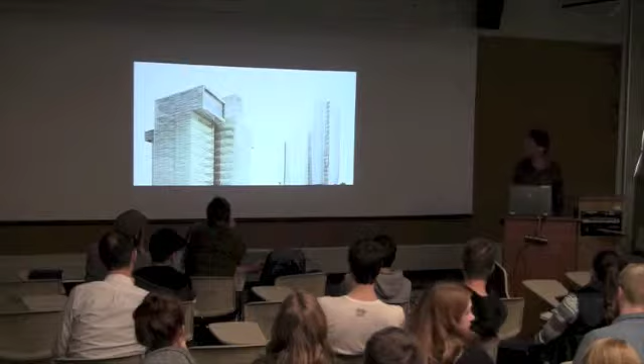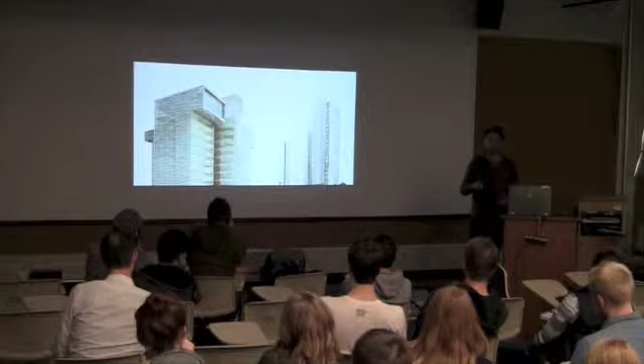One's from 2001, before there was even V-Ray, and that one is 2004-ish. The reason I put these up here is because they show the kind of designs we've been trying to achieve. The attitude is all about repetition. There's a hidden formula in both of these skins where a pattern repeats over and over again, but we're trying to make it look like there is no pattern. We're trying to get away from that Miesian, repetitive office building look, while still working within a manufacturing process based on a part that gets repeated over and over again.

This is a lab project that I worked on in Buffalo. It's also one of those buildings where you can see we've cleverly tried to mask the fact that it's really a pretty basic system, repeating over and over again.

It's a Centria metal panel on the exterior, insulated metal panel, and the glass windows inset into the curved facade are actually flat—they don't curve with the building. So we've cleverly tried to create something that looks non-repetitive and unique, but in a way that suits a manufacturing process we thought existed. I think at the time it did—it was a true piece, a reality.

These are views from the inside. I put this image up because we always have this problem with variegated facades, where we have a pattern on the exterior that we want to be repetitious to create that texture, but there's always a compromise—there's always a place where you want a big window on the inside and a small window on the outside. How do you resolve that? With a system based on repetition, it's less flexible, but if you have a system with a lot of components and variation possible, you can deal with situations like this.

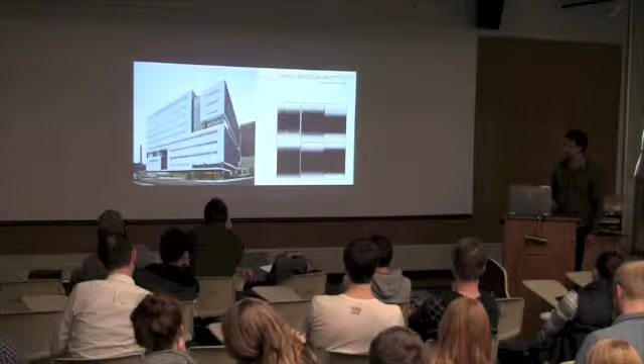Then we looked at what kind of pattern we would create. We used different frit patterns and dot patterns to create a very gradual blend between the two. It opened our eyes and made us start thinking that, depending on your construction process, you don't necessarily have to think about mass production—because if it's a printer, it doesn't care.

That evolved into the next series of projects. This is another project where we're looking at variation on the facade, but trying to rationalize it down to just a few simple components. I think the interesting thing about this project, though, is actually the roof, and I'll get into that, because that's really where digital fabrication became essential to pulling off the project.

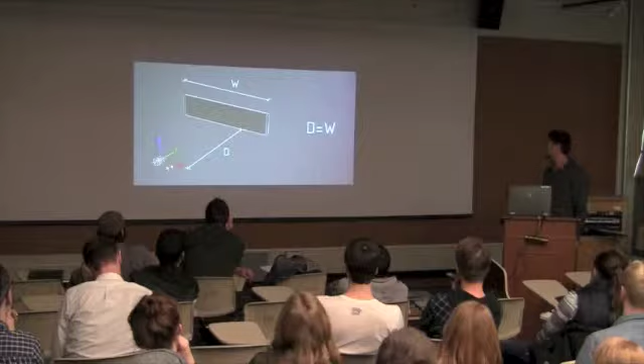So let's see what I have here next. This is a video that shows how we developed that facade. Let me see if this one will play—some of these will play, some of these won't. It's okay.

It's fun, because I don't really want to talk about the facade. It's a point attractor. Are you guys familiar with point attractors? Anyone ever do those in scripting? Basically, it's a relationship between these points floating in space and those panels. The closer the points are to the panels, the more they're going to open up. So we can create this pattern by manipulating these points. So the point is that someone doesn't have to go in one at a time and change each panel, because now we have sort of a marionette. With a couple of different controls, we can create all this patterning and all these effects.

I wanted to return to that later, though, when we talk about Grasshopper. So really, I wanted to talk about the roof more. This one, check out this roof. It's first of all, it looks pretty simple, but it was actually pretty tricky to model.

You could do it in Rhino, but there was a lot of blends, and it ended up being this poly surface that was really hard to manage. If one thing changed, you had to rebuild the entire thing. So it wasn't really practical to work with it in that format. At the same time, we've got this kind of free-form surface. How do we manufacture and how do we document that in a way that doesn't freak people out? Because they're going to look at that and see this completely non-repetitive, non-uniform thing, and they're thinking in terms of manufacturing is about repetition. So we did our best.

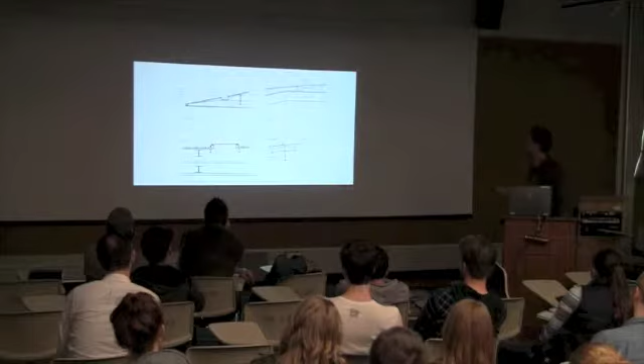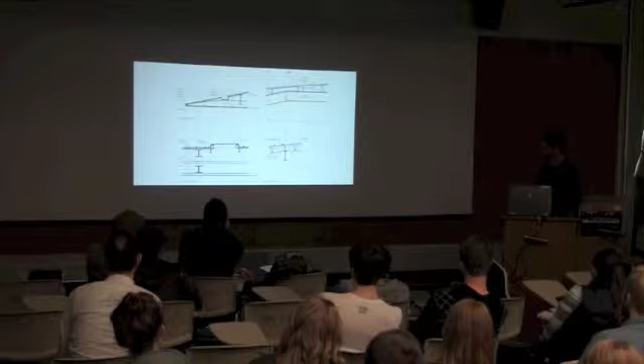So that really got us thinking. These are some of the details for that project. Skylight - these, he calls them flicks, but they're just little pieces of light gauge framing which you kick into place. And those are the ribs that he brought, that he would produce and bring out to the site. And that's the drawing for the roof.

So what's interesting about this is that this drawing doesn't make the contractor feel that good. Contractor pricing this, they see a lot of contours and they get really nervous. High prices come in because there's unknowns. I mean, if you don't know something, it scares the hell out of you, so you mark up the price as high as it can go.

But once you do quantify something, then you can price that accurately. Even if it's really intense, even if it's really difficult to pull off, you can put a price to it. It's not so scary. And that's the lesson we learned from this - once we had the system in place, and those people could price the system, we got to a point where everyone was happy. If we had never got there, we would have just made a couple of domes, and I don't know what we would have done. We would have had to change it significantly.

So the project after that one was Jacobs Medical Center. This is a hospital in UCSD, UC San Diego. It's a pretty large building.

It's an all-glass building that has a frit pattern on the glass, and it has kind of a device on the facade where there's these cuts into it that are positioned strategically based on solar data, and that allow it to perform in terms of the heat gain.

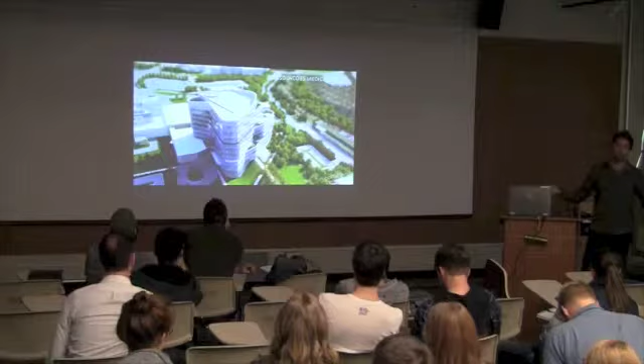So having had the frit experience on the previous project, we said, well, we can print any pattern we want on this building. There's really no limit to it, so why not really explore what a connection could be between the movement of the sun and the frit pattern on the building, and really link those things together. So that's when we started getting into analysis.

So analysis, just like we're using Ecotect with this one, which is an okay analysis tool. I don't know if anyone's had any experience using Ecotect. Has anyone used any other analysis tools? Structural analysis, environmental analysis, anything like that?

Well, I don't know what your experience is, but when you first get into those tools, a lot of times they're telling you tons of stuff and you don't know what it is, right? You don't know what the metrics are, you don't know what the data means. So the first step is really to try to figure out what it is you're getting.

And then you don't actually know if that tool is giving you accurate data. I mean, that's something we take for granted. A lot of times someone puts a piece of software in front of you, it looks really fancy and it's got great charts like Ecotect, but no one's actually tested it. Which, I mean, it blows my mind, but it's true. No one's tested Ecotect. It's not a validated piece of software. It's giving you information, but no one knows for sure if it actually reflects reality.

We didn't really question it all that much for a while. We just used it to kind of create comparative analysis between different runs. But eventually, enough people were asking tough questions, we were like, we better figure out if this is real or not.

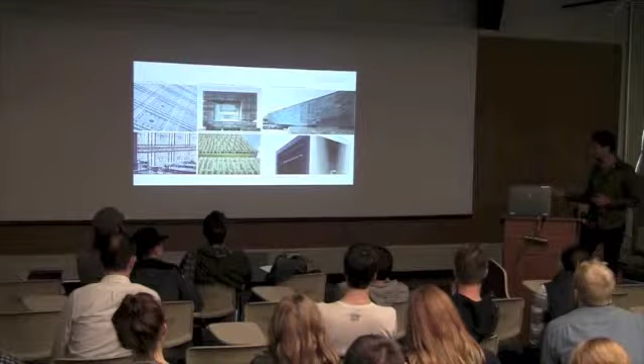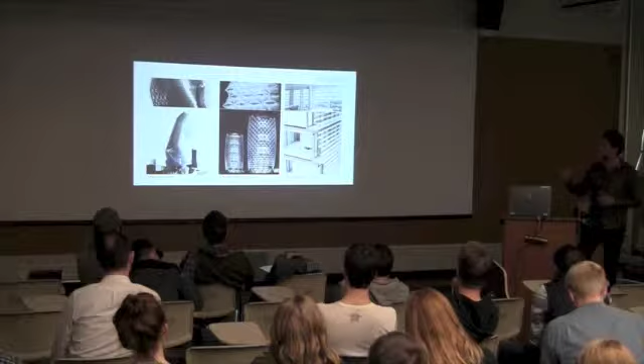And then projects that were under construction and are now, like this one, finished. I don't know if you guys have seen this one, but all these panels push in and out like umbrellas, and they can open and close. It's in Abu Dhabi, which makes sense. There's a lot of sun there, so solar heat gain is a big concern.

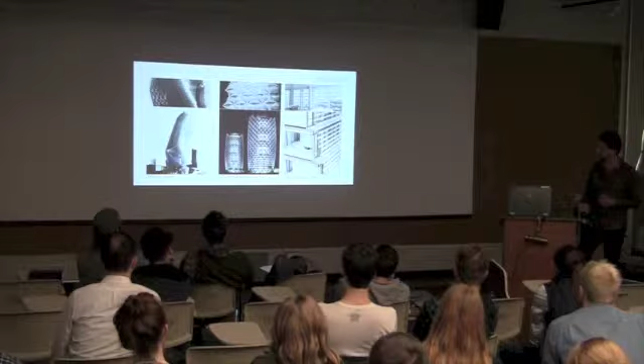Phare Tower, I think, as a whole. This one I think never happened. And then we started seeing systems that were basically products, off-the-shelf products. So like this one over here, this one was more of a research thing. Very cool though—if you've ever seen the video, it's amazing how this kind of morphs into that.

And it's really just two pieces of dissimilar metals. One heats up faster than the other, and they basically expand like a lung. So you get a more opaque glass surface when that happens—it responds directly to heat. Then there's Hoberman Associates and the kind of stuff that they're doing. And then Soladigm and Sage, which are electrochromic glasses, which will tint on—which kind of suck.

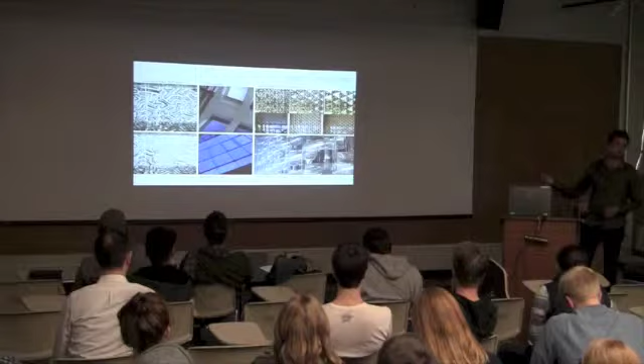I don't know if you've ever seen those in person, but the panels of glass are really small so far, and they don't look that great. But the technology is getting better—it's something we can expect to improve over time. The mullions are hugely thick, as you can see, and all that bad stuff. But definitely something that has potential in the future.

So how is this any different than what you're taught to do in school, or what we've been doing for the last 100 years? Aren't we supposed to be making responsive buildings? Aren't you supposed to put horizontal overhangs on the south side and vertical fins on the east and west, and shape your building accordingly?

Yes, but what we're talking about is a fine-tuned building where every panel can be slightly different based on its exact location. So if we can tune every single part of the building to its specific location, how much better can we do performance-wise than using these generic, one-size-fits-all strategies? Especially now that we have the tools and construction methodologies to produce those kinds of buildings.

So this kind of idea where you've got a series of panels, this is pretty much just a decorative screen, but it is a demonstration of how you can create variation to be responsive to any climatic condition you can choose.

So how do we develop those systems? They are complex. Every panel is different. We can't go one at a time and model every single panel where every single panel is unique. It's way too labor intensive.

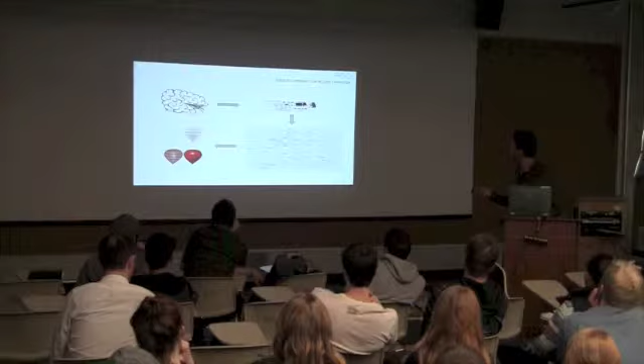So we did another proof of concept, which is using a sensor and Grasshopper and a 3D model in Rhino. And if this doesn't play, I'm going to open it up and play it separate. Let's try it. Just give me 1 second.

So what we've got is an Arduino board, a bunch of sensors - that one was the wind sensor - and Grasshopper, which models the balloon. So everything's linked up: wind's blowing, Grasshopper feeds data into Rhino, Rhino builds a balloon that blows up and acts like a balloon. And it's all just a bunch of little off-the-shelf components that aren't really that big of a deal. The proof of concept was this isn't that hard to do, and it's not like space-age technology. It's around and available.

Definitely interesting for us. Unfortunately, I'm going to have to keep doing that for the presentation. So...

Yeah, I want to show you guys this one too. Is anyone familiar with Galapagos? Okay, so for those of you who are not familiar with Galapagos, this is another way of parametrically modeling something, but this is a tool that we can use for optimization.

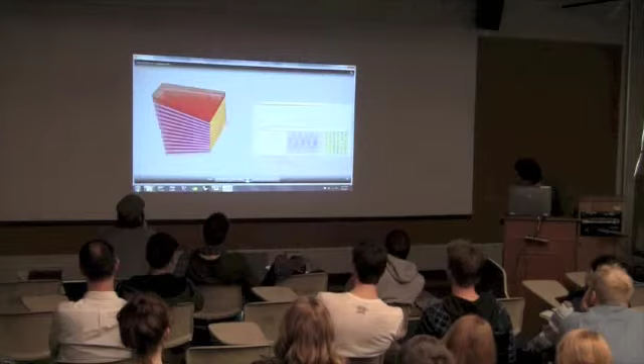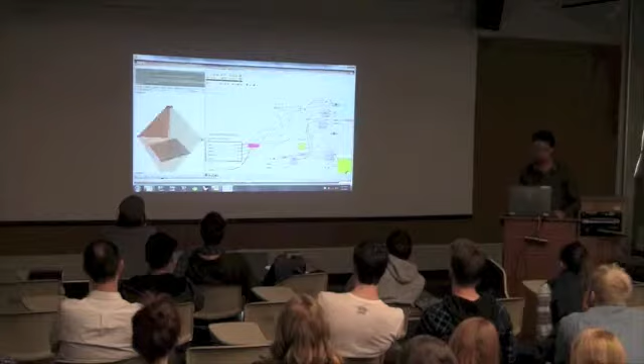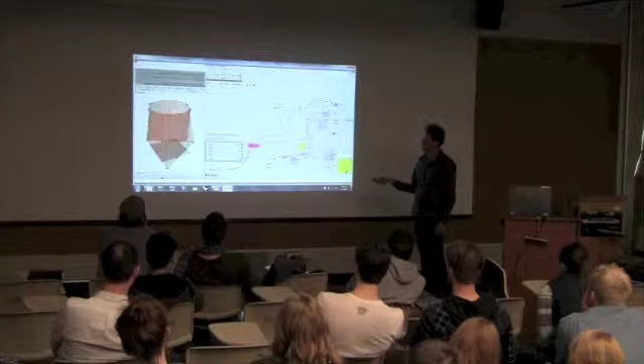Okay, so this is demonstrating what I'm talking about with the genomes. These are the options it has to try out to make these different cone shapes. It's got one that controls the top, one that controls the bottom, and a loft between the top and bottom. So we've got those as genomes.

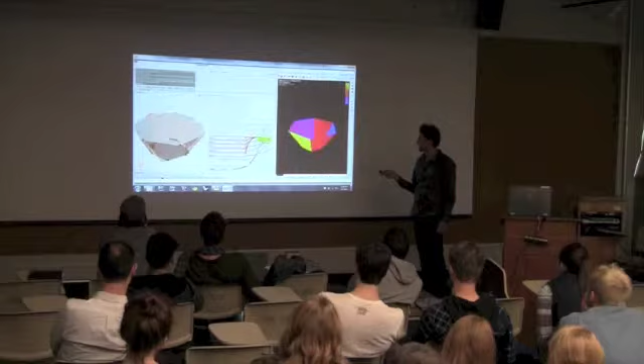Remember, our fitness is the lowest amount of heat gain from the sun. So you start Galapagos, and it starts testing. This isn't real time, but it's close, because we had the settings really low—it was a proof of concept. Now the computer is automatically iterating for us.

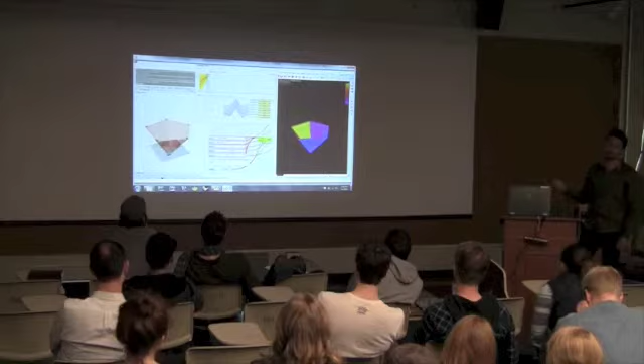It's going through thousands of options, and in this case, because we asked the dumb question, it's going to tell us something we could have figured out on our own. But the point is that it all works, and we can use it to solve much more complex problems, and at least inform us when we're making design decisions.

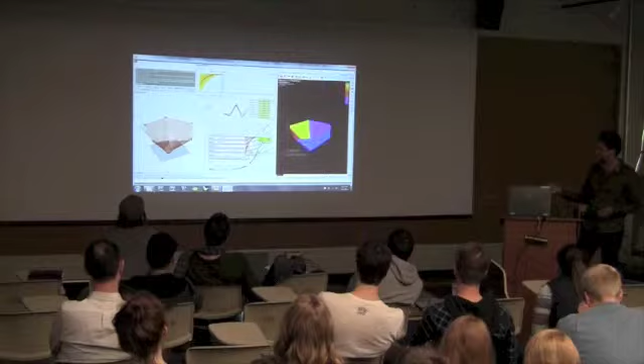So that shape probably looks pretty familiar to you—it's like an air traffic control tower, and that's because those towers are meant to block glare from the sun. So it's basically trying to shade itself as much as possible, while also reducing surface area as much as possible.

Now we run it backwards, but you get the picture. So we sort of proved that this could all work, and that we could use these tools to inform design decisions.

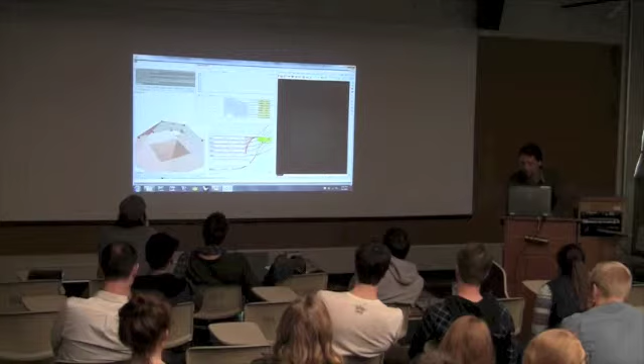So then we took it to the next level. We said, what if we did a project where the entire thing was based on relationships? The entire thing is a Grasshopper definition. Everything is driven by views, solar radiation—it's all based on data.

I mean, there's design going on too, don't get me wrong about that. But it's all being informed by the things we talked about. So the structure, the skin, the energy modeling, and the rationalization are all built into this definition.

This was a stadium project, so we took the code book and fed it into Grasshopper using our in-house stadium experts. The seating was arranged completely prescriptively by code. Usually it takes an expert a week to lay out the seating for one design - there's this genius process with secrets about view corridors and such. We fed all this into Grasshopper and it just spit out the designs. As soon as you draw the curve, there's the optimal seating arrangement. It's the kind of thing that really changes the way the entire industry works.

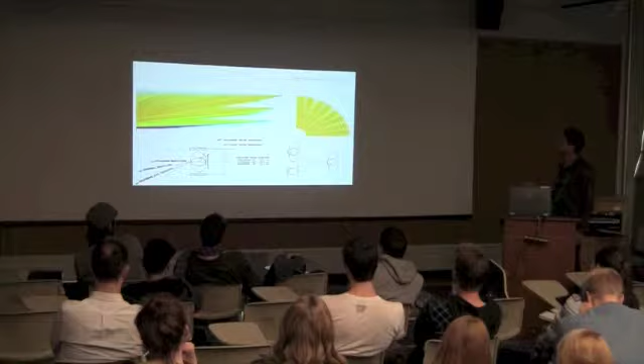So as you can see, we're drawing sight lines to the field, and that has us optimally positioning all the seating.

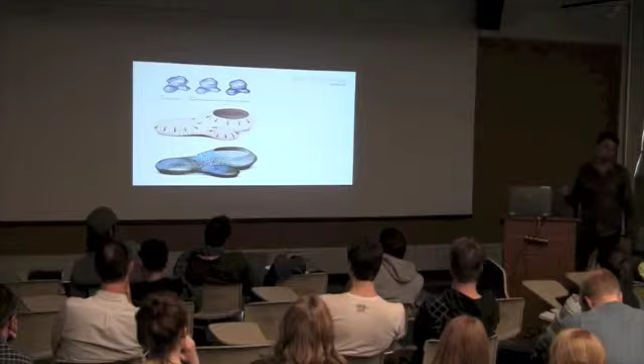The shape itself was created entirely in Rhino using T-splines, and we start to create panels. We look at the solar radiation on that form, and the panels are informed by the solar radiation, so it becomes this big canopy. Where you need more shade, the panels fill in, and where you need less shade, the panels aren't full.

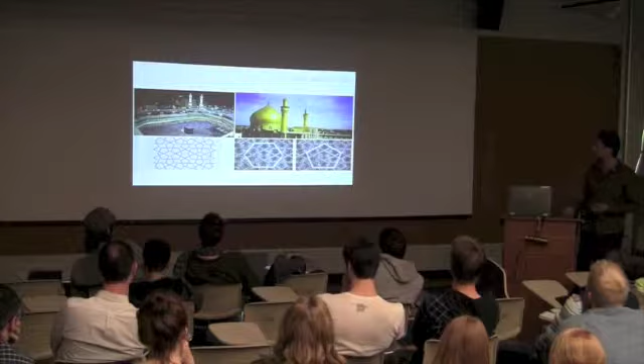The panels are influenced by Arabic motifs. You can see the solar radiation information coming in, parsed into 10 groups, so 10 panel types. Those 10 panel types are dispersed around the surface - we've got the 10 zones here with different panels, so it thins out as there's less need for shade.

What's interesting is when you look at the raw material it took to get to this level of sophistication, you're talking about a 40% performance improvement, because you put material where you needed it and took it out where you didn't. If we had done a standardized panel, we either would have used more material or the performance wouldn't have matched. Something to think about.

The other thing we looked at was where we have the most curvature, we probably need a curved panel; where we have less curvature, we could get away with a flat one. That's another one of those scenarios where flat panels are cheaper than curved ones, so if we can minimize zones with curves and just have curved panels where we need them, that helps us get the building built.

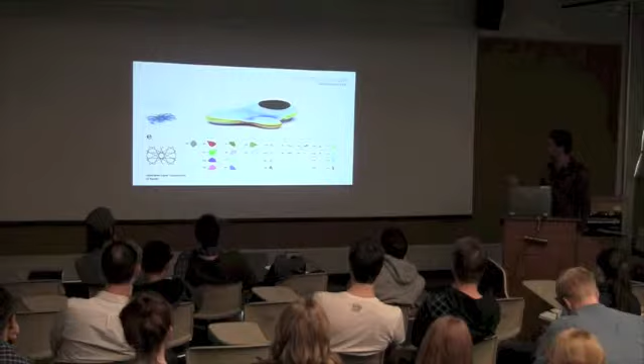All of that shows the different relationships between solar radiation and panelization. We started to experiment with documenting that graphically, showing all this data in a chart. This chart, I'll be honest, doesn't tell you much - we're just practicing, it's a first stab at something, really just a bar chart wrapped around a circle. But you'll see in later iterations we've made this a lot more meaningful.

And that's the resulting project. It was a competition - we unfortunately didn't get it, so this one didn't happen. This is a project that is actually happening, under construction now. They're just starting construction on this scrim as we speak.

This project was pretty much the same idea. We had a lot of glass on the exterior and a metal scrim, and we wanted to open up apertures where there are views and big spaces on the interior. At the same time, we wanted to shield the building from solar radiation and glare. There's a skylight in the middle - a view inside. So that was our proposal on the project.

We got the project, we were very excited. This is for a company called CJ, by the way - anyone from Korea would know the name, they're like Coca-Cola in Korea. They make everything - medicine, food, they're a huge company. The chairman is a big deal, president kind of guy - when he shows up at the building, people stand very far away from his car. He came to one of our meetings and said, 'I need an only one kind of concept.' We didn't really know what that meant, but it roughly translated to something like, I need something completely unique in this building. So what do you got?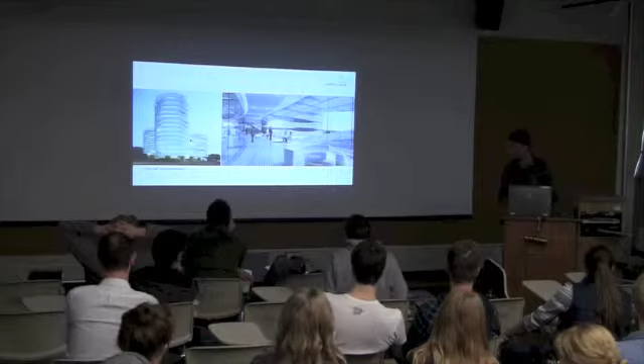We did do a lot of research on kinetic facades, and I'll get into that later, I'll tell you guys kind of where that went. Long story short, it's not a kinetic facade building; it's a fixed facade building, but it is optimized, and we did do all the stuff that we talked about.

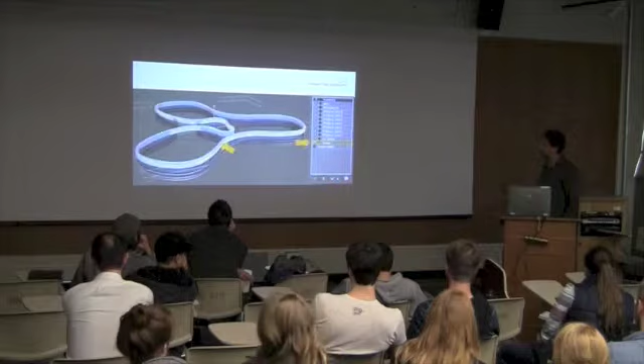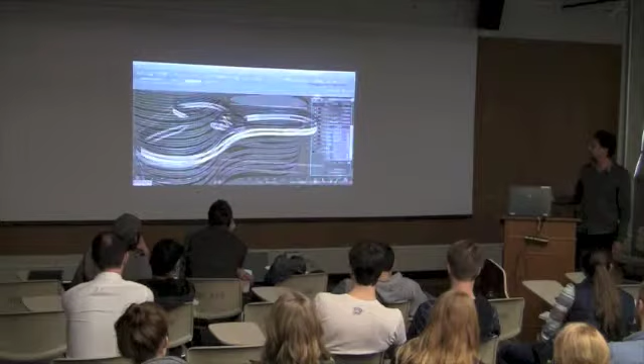It was modeled parametrically, but this time we used 3D Studio Max. It's kind of the same thing, it's just a procedure. So we were able to control where these apertures happen really easily with just a series of steps. That's recorded in our modeling process, and then each step is something that we can tweak. So I'll just go through this quickly, but that's basically how every band is modeled. That's a video you can watch.

And the way that we modeled it was really analog, like really low tech. We basically took the floor plan and put it in the file with the solar radiation data and manually put the apertures where they made sense. There was no magic to this. I wish I could say we did a grasshopper script and figured out what big public spaces were with the apertures right there, but that's not how it happened with this project.

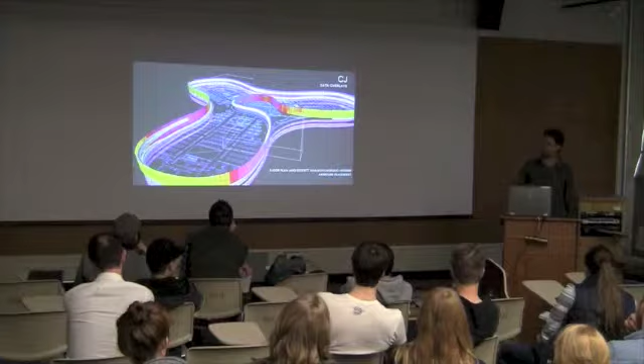And this was like 3 years ago, so we're getting there, but we weren't there at this point. The intent was there, though. The intent was to make this high-performance facade. So what we did was we built these masses wherever there was a big open public space or open office space where they needed more light. And we overlaid that with the solar radiation data, and we used that to design the facade.

At the same time, we started looking at what that data meant. Now you notice, whenever I show you one of these colorful solar radiation images, you don't really get what's going on the backside. And that's the worst part about these things, is they're great if I have a 3D model in front of you and I can spin it around and you can see what's going on. But there's really no way to get a sense of what is happening to the building from 360 degrees. So this was our first effort at creating a two-dimensional, one-frame graphic that represents what you're seeing here.

So each of these circles is a panel on the facade. And the amount it's displaced from the center is based on the amount of solar radiation it's receiving. And the direction it's pointing is the direction the panel points. So by looking at the chart, you see the southeast orientation is a big problem. I've got a lot of area there. So that's something I might want to address.

And then I do the same analysis for a pleated version. This is a continuous pleat. It doesn't have any of the variation I showed previously. We compare that, and we see that we've dealt with a lot of that bad stuff happening on the south-southeast. And actually, we reduced the solar heat gain on the facade by 54%, which is huge. I mean, that's a crazy number, but it's because we basically wrapped it in another skin, so it's kind of cheating too.

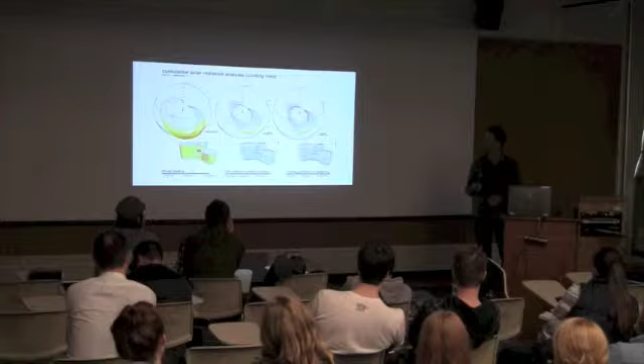It was really tough because we had to make this argument and we didn't have data to back it up. The argument is that I'm only showing you heat gain, I'm not showing you daylight. And daylight is actually more energy cost than you spend on cooling the building. So if I can let more light into the spaces that need it, and dim the lights inside, I can save more energy than I would by just putting shades everywhere. Unfortunately, Ecotect can't do that calculation.

The daylight calculation that Ecotect did used this generic cloudy sky model, and this kind of fine-tuning is completely transparent to that analysis. So we were pretty distraught to find that out, and this is one of the reasons we moved over to DIVA, because now we can do that calculation and give people a more holistic idea of the pros and cons of doing something like this. Fortunately, they took us on good faith, and we moved forward with this design. But it's a really good example of how it could have not gone that way, because we weren't armed with the right tools to make our argument effectively.

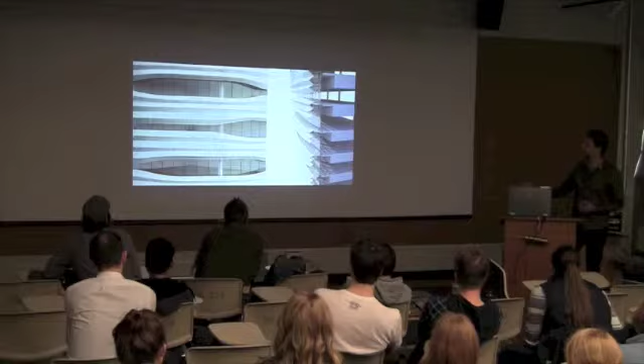This is an explanation of the chart we just went through. Another rendering of the building, getting in closer on the skin. So we went with an aluminum skin, perforations that vary depending on the orientation. That was done in Grasshopper. We scripted it so that they flow with the curves. It's pretty cool to see it close up, and some details of the system.

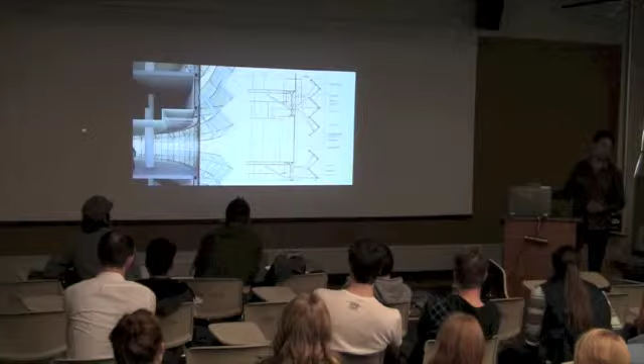Another really cool thing about this building is we didn't have any mullions in the building. Completely eliminated them. We worked with Arup, great engineers, and they helped us figure out what's called a strong back system. There's actually a big steel truss up there in that plenum space, and that makes it stiff enough, but you don't need any mullions. The glass is super thick, like an inch thick, and it's extremely expensive, but it's also completely open. There's nothing blocking your view, and they have great panoramic views all around the building.

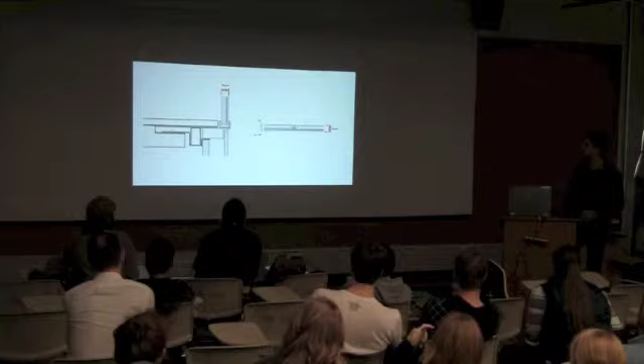That's the glass section. It's two pieces with PVB interlayer, airspace, and then another piece with a lite of glass. So almost 2 inches thick, about 50 millimeters. So that's crazy.

This is how we did the perforated panel, the perforated pattern on the facade. We basically brought the Max model into Rhino. We converted the surfaces, converted the meshes into surfaces, and then we ran the script on it and generated a series of panels that a manufacturer can then cut into each aluminum panel. There it is under construction, and that's the accepted mock-up of the skin.

So as you can see, a lot of complexity here. There's a ton of variation in the panel size. The holes are changing. It's basically, not every panel is unique, but there's something like 200 some unique panels on the project.

So how were those manufactured? They're actually manufactured flat, and they're just cut so that they're basically unrolled in Rhino. Then they're plasma cut out of a big piece of aluminum, and then the holes are punched in. There's a punch that would punch in the holes.

Those are, because it looks like there's undulation. Yeah, so it's actually flexible. It's super thick, you wouldn't think it's flexible. It's maybe a quarter-inch thick, probably even thicker than that. But it's aluminum, so it's not super heavy. And when it's in big enough pieces, this piece right here is probably like 15 feet long, so when it's that long, when you lay it down on a steel tube, it'll conform to the tube. So it was literally, this is an unroll in Rhino, and then that's the cut pattern, and then they punch in the holes.

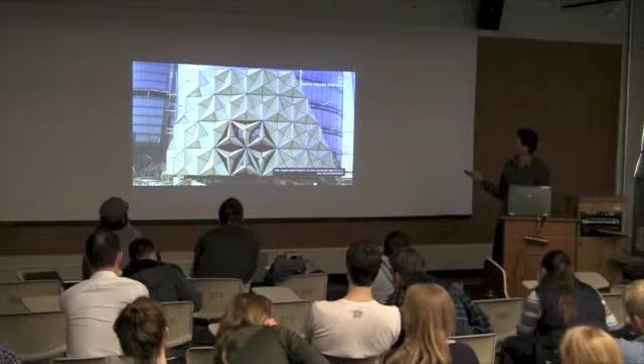Okay, so this is the kinetic facade part of the discussion. This is the project I was telling you about in Abu Dhabi. We worked with the engineers. The guy, Matt Williams, who works at Arup, who's the leader of the facade group, came over to us to help us out with CJ.

This is a PTFE, which is like a fabric. I think PTFE is, what's that Teflon material? What's Tupperware? Tupperware. Anybody? DuPont. It's basically like a fiber, like a nylon fiber covered in Teflon. That's PTFE. I couldn't believe it. It was really good.

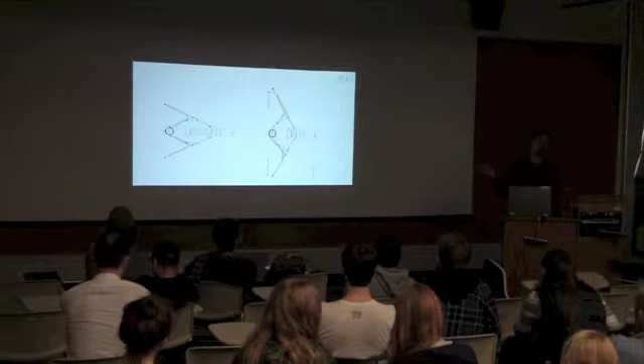Anyway, so this was the system that he started with. These are some of the sketches he did for us. So basically like an umbrella, and it had a linear actuator in the middle that would push out and sort of do the folding thing. But it wasn't doing what our design was doing, which was really being more of a pleat. It was just a single fold. So we tried to work with them to get back to more of the folded thing.

And he had this idea of a trap, but I was really enamored with the umbrella idea and hoping we'd push that. So I found this old, like Grandma's Burberry umbrella, and it had this mechanism in it that was totally awesome, doing exactly what we wanted to do. So we looked at how that worked and used that as the inspiration for the system. It's basically a linear actuator with that on the end, and it's like a hinge system. It works just like an umbrella.

That was pretty cool. I think Matt was really into that, and that was actually where we left off. We're going to start to develop that in elevation. We had sort of figured it out in section already. To prove the concept, I modeled it in Max with a bunch of animation tools, because people don't really believe things until they see them for themselves, and that really made a difference.

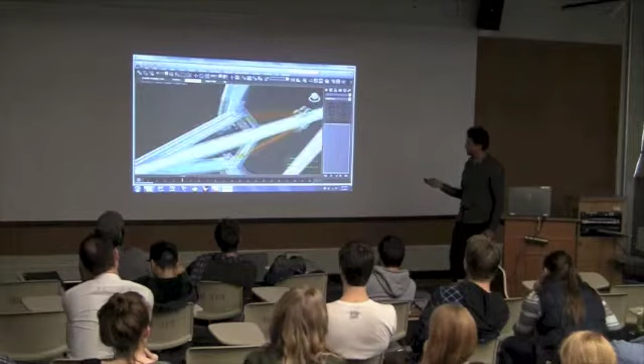Essentially what's happening is you have a linear actuator right here and a trap right there, and this arm is pulling on that arm. So it's a pretty simple system, not anything out of the ordinary. It's just these two linear actuators.

The problem we were having was with the material. We didn't have the material at the time to put on this that could do the stretching and stay taut. Mehrdad was really focused on keeping the look of the building, so he didn't want to sacrifice the aesthetic, which was this kind of taut, sheer scrim over the entire building. And because it had to constantly stay taut, it couldn't do what the umbrella is doing, which is fold up and crinkle up. We didn't really have that material to do that. So we moved away from that kinetic system and went back to the metal scrim.

By the way, they did actually give us the choice. They said you could have a kinetic system, but it's going to be like a bunch of little garage doors that open and close, and it might open and close separately from one another. It was kind of tempting still, even though it's totally not our design. It was like, but it would move, the whole building would move. But of course we didn't do that.

So anyway, I'm going to do one more project. I think that it's pretty relevant, and then call it.

So this was a competition for a new federal courthouse in downtown Los Angeles. This was done last summer, I think.

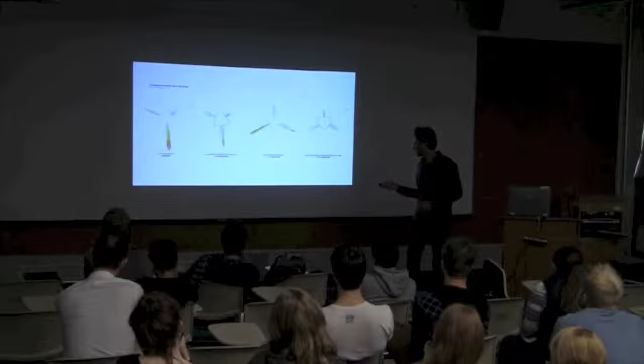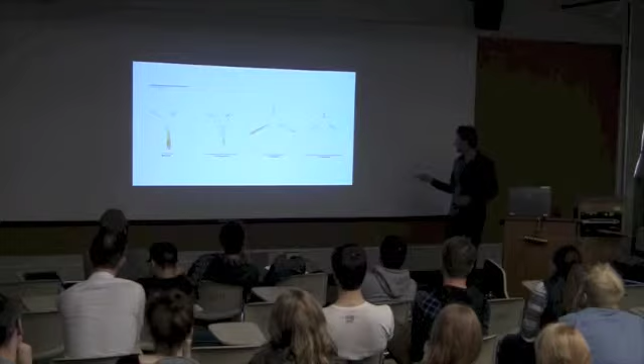This is really interesting. If you look at the baseline, you get a 25% reduction by rotating at 60 degrees. But if you know you're going to have vertical fins shading it, that's not the optimal orientation. The optimal orientation gets you a 31% reduction if you orient it solar-wise that way.

So this happens all the time. You go through step one, the massing - you figure out the optimal orientation for your massing, okay, now I've got that. Now what's the facade system doing? What's the optimal facade system? But if you can do both of those things at the same time, you'll get a better answer.

The thing is, because we often go through a linear process, you can never optimize it to that point. Here's something now where, because you have tools like Grasshopper, you can instantiate a bunch of geometry like that. You can study orientation and shading together, and do that on day one. And because you can do that, you can make better decisions.

So the building was sort of inspired by the verticals of vertical fluting on traditional columns. We used that as an opportunity to create shades, privacy, and variation in terms of porosity in the building.

It's a very rational plan - triangle-shaped courtrooms in the middle. It's extremely efficient, and the contractors loved that part of it. The part they didn't love was all this variation, because it looked to them like every single panel was different and that they would have to fabricate each piece individually.

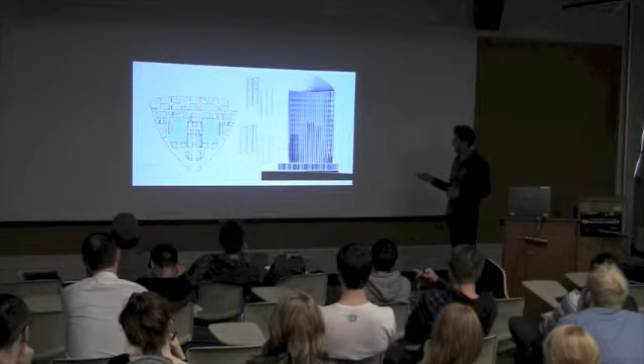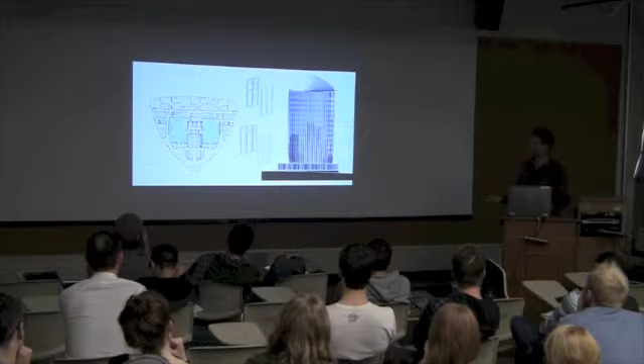On top of that, it looked to them like every piece of glass would be different too, because the building's tapering in terms of form. And they didn't know what that difference was - they didn't know if they had 500 unique panels or 200 unique panels, and that scared the hell out of them. They weren't willing to go forward with that.

This is explaining what the system is doing. You can see that the vertical fin, as it pushes out, it pulls in. So you get more glass and more shade, or more insulated surface and less shade.

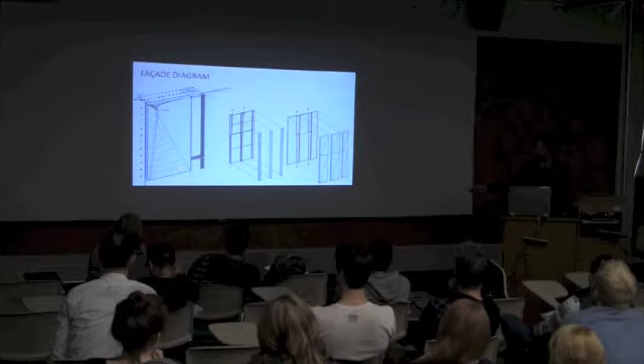It's a close-up of what the skin's doing. You can see it's pulling out here on the end, casting more shade. Where here, I think this was like a stairwell or something, so we made the windows small, more insulation.

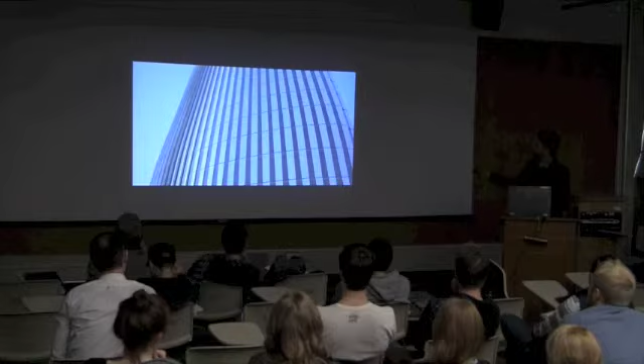We started to give the contractors data - we thought this could help, right? We can at least tell them how much material is on the building, that should help them give us a price, right? It didn't really help because it's too general - it doesn't explain the complexity, it's just about the material. So they don't really care if there's X amount of metal panel in the building. What they do care about is that every single one is different, and it would be months and months of fabrication time. So this wasn't really working.

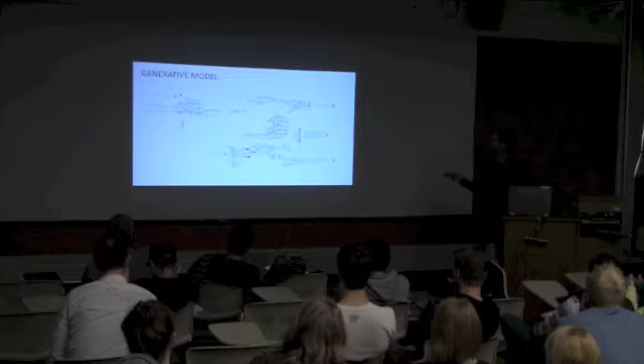So as we were working and moving forward, we started to come up with a model that's completely generative. We've got building variables, and then we start to create different outputs. One of those outputs was a curtain wall schedule - so what we did was script, as part of the design, a curtain wall schedule where every single panel was laid out on a sheet.

This gets generated while we're designing. So if we change the shape of the building, this entire schedule changes and updates. The counts update—all of this stuff is updating in real time.

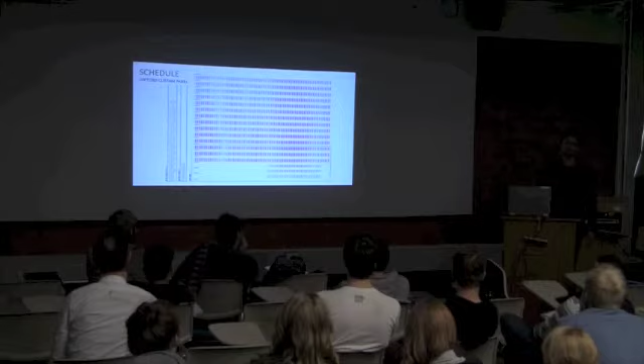This came out of necessity. We were totally out of time. It would have taken their team 3 weeks to rebuild this entire thing in Revit, which is what they use to price their stuff. So I got on the phone with them and said, what can I give you? I can give you all this data, I've got it all, I'm excited. And they're like, well, just give us the file because we're going to rebuild the entire Revit model.

I'm like, really? Why? Maybe we can give it to you in Revit or something. And they said, well, we've got this family that we use in Revit, and it spits out numbers of material and tells us how many panel types. And I'm like, well, why don't I just give you that directly? We can save the 3 weeks, because by the time you're done pricing it, we'll have changed it 3 times—we're in a design phase.

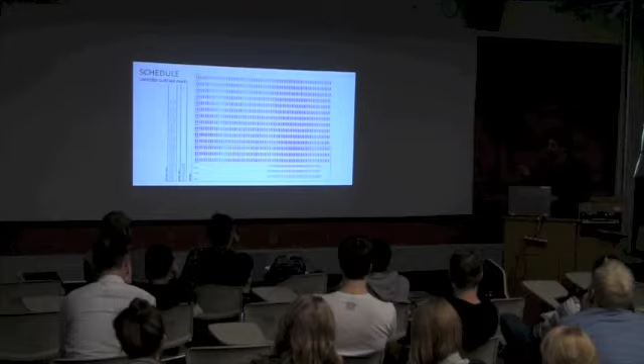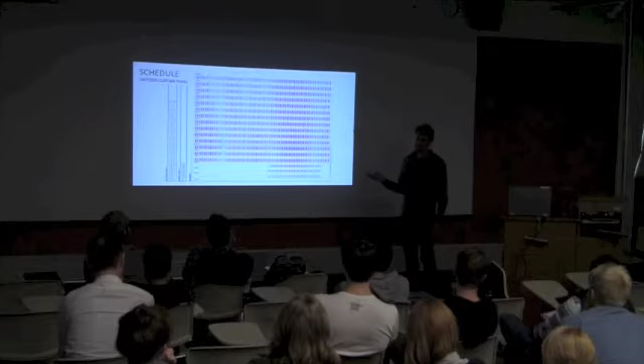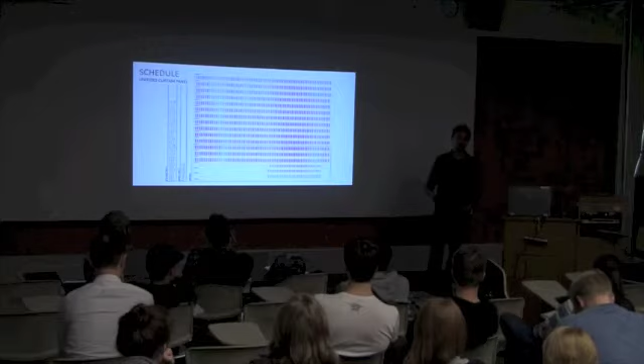So this is what we came up with: the panel schedule. Basically what you have here is a key that tells you how many unique panels you have. It really boils down to just 12 curtain wall panel types, and there's 53 fin types. Even though that seems kind of high, and there's probably a lot of complexity in the ones down at the bottom where they're tapering, because we could quantify it—it's a known factor—they could price it. And they did, and it turned out that's something they could live with.

Also, if you look—I don't know if you can see it that well—this panel type, this fin type LJ, has like 2. We could have easily bumped that up to the next one up or down and just had maybe either. If we had worked on this a little bit longer, we could have gone from 53 to probably 45 unique panels. It wouldn't have been that hard.

So that's the kind of conversation that goes back to the original point I was trying to make, which is to pull this stuff off, you have to be able to manage your data and communicate effectively. That's really why we were able to put that proposal forward. If we hadn't had these tools, we would have dumbed down the system—we would have had like 4 panel types and 1 fin type, and it would have been a repetitive thing you see every day. So that's the story with that.

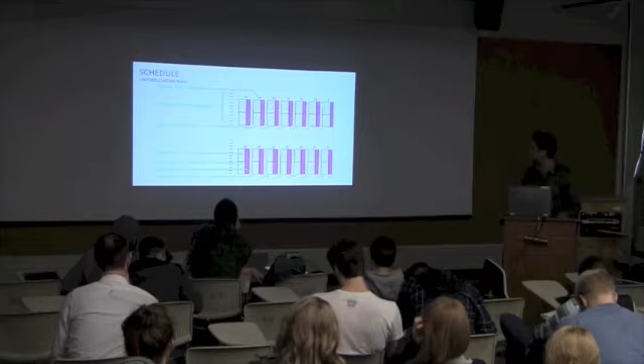This is a closer look at what you were looking at with the little square. Each one of these shows a panel type—you've got everything from G, L, A through L. It tells you how many in every row, and then the fin type is down here. So an HH means it's an H profile at the bottom, H profile at the top. GH means it's shifting between a G profile and an H profile. We're able to catalog every single one of those and figure out there's 50 combinations in the entire system, and we can probably get it down to 45. So that's how we do that.

Okay, so the last part of the talk is about optimization and automation, and I think that's going to roll into the demonstration part.